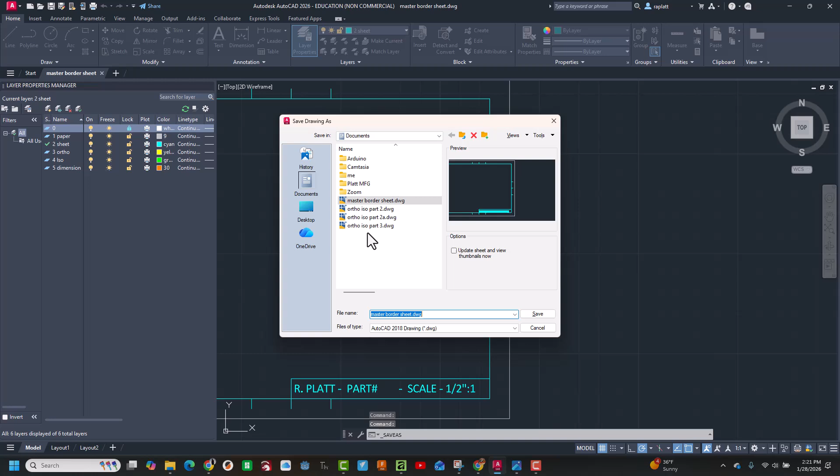Now at this time, let's go ahead and create part number 4. And like the last 3 previous ones, we're just going to double click on our master border sheet. And as soon as that comes up, we're going to make a couple quick changes and I'm going to check something. So I'm going to save this as, go ahead and hit the Save As button here, okay. And this time I'm going to say ISO part 4, okay. That way we protect our border sheets.

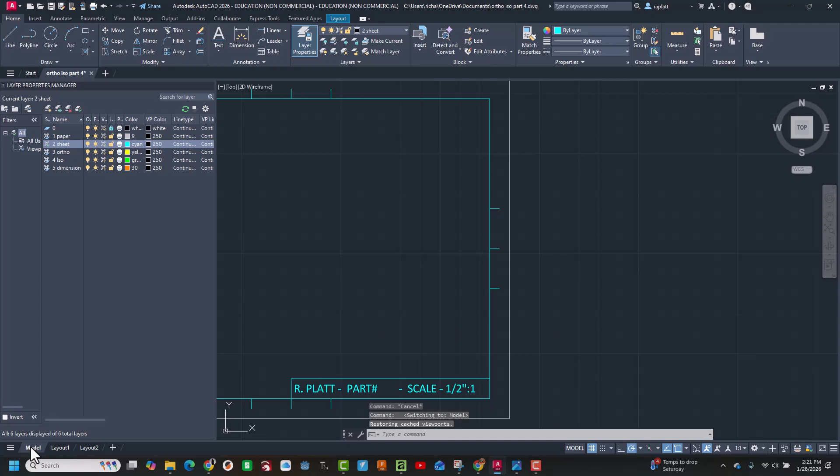Now I'm going to quickly come down here and check on model and make sure that all my print colors are correct. So I'm going to go here to layout, okay. Go back to model and double check everything is black. That looks good. Okay, so now let's go back to the model view here, model tab. We'll go ahead and center this up a little bit here. We already checked out on sheet. So come over here and we'll put in 4.

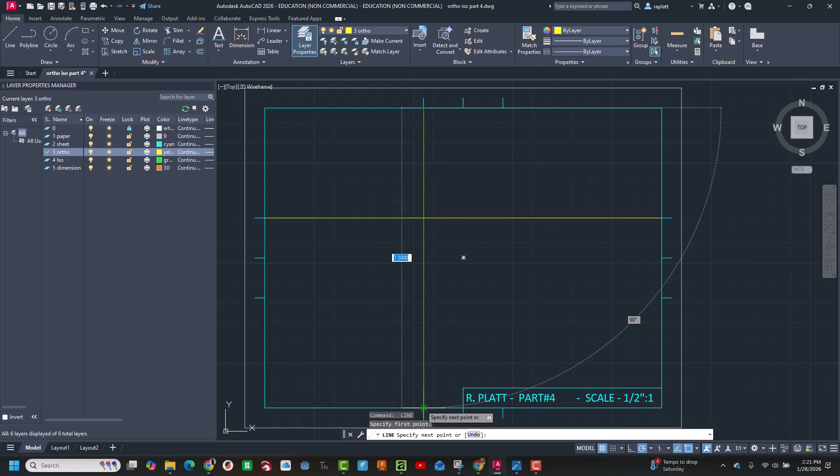Okay, before we actually look at the drawing, I'm going to go ahead and start laying out what this drawing is going to look like. So we'll go ahead and do our layout line. So we'll go ahead and hit the line command. And we'll come over here and click, go across here, hit escape, spacebar, which repeats the command. Come down here, snap on that, escape, spacebar, come up here, grab this guy here, come down, click on that, escape. Okay, now I'm going to hit my spacebar again, so I repeat that command, come over here, do this, and we got that in there.

Now, just because of the last time I did this, I'm going to go ahead and trim out this line here, and this line here. Quickly do a save, which is important. And now I'm going to go back and find that part 4, which I think is this guy right here. Yeah, that's it. Okay, it's a pretty simple part. This is not going to be that hard. The main thing we got to worry about is these hidden lines, and I'll show you how to set that. It's not that tough. So let's get back over to the drawing and start drawing. And remember, it's 2.5 high, 5 lengthwise, 1.5, and all those numbers divided by 2.

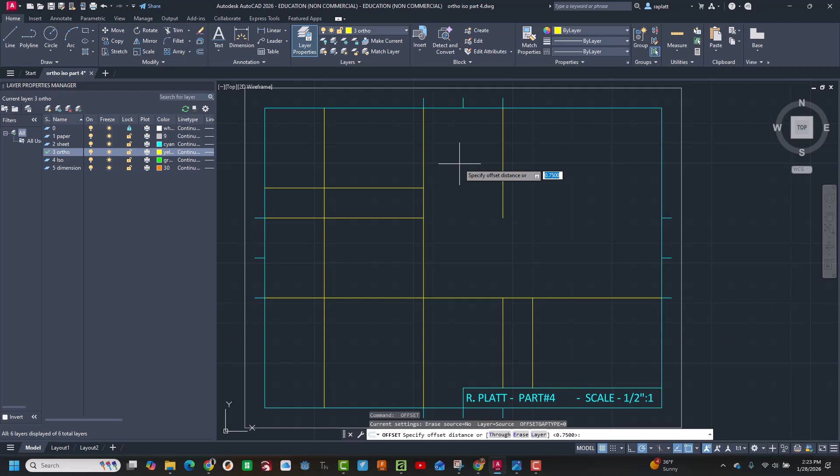So we'll quickly go back to our AutoCAD file right here, and we're going to go ahead and do our offset, and we're going to set our offset to 2.5. We'll hit this guy right there, comes over here, hit our escape, spacebar, this time 0.75. Okay, we'll go up from here, up. We'll come over here to this one and go over. That's good. Now we'll hit escape. And we're going to hit spacebar again. This time I'm going to say 1.25. Now to get us the height of our part. Come down here, got our height of our part.

Okay, let's go do some trimming right now. So we're going to trim all of this here off. Trim all of this here off. Okay, come back here and trim that. It's pretty easy. Now what we want to do is go back to the drawing, take a quick look at it. Okay, this says that it's going to be 0.25 high, 0.25 low, which is dividing 0.5 by 2, okay? So come back over here.

We're going to go ahead and do our offset, all right? So we're going to key in 0.25, enter. We'll grab this guy here, come down, okay? We'll come up here with this one and go up. That's easy. So hit escape, come back over here to this. So that thickness is right here. It looks like 1 inch. That's divided by 2, so it'd be 0.5.

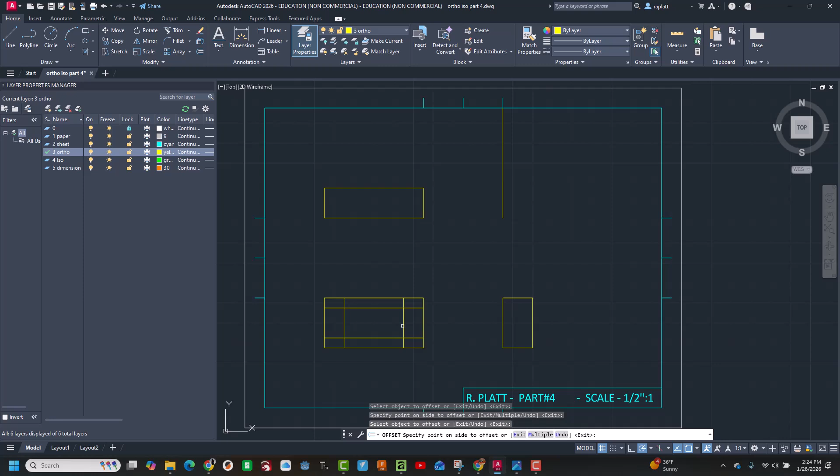Hit our spacebar again. This time we'll say 0.5, and we'll come over here and grab that one right there. Good. Come over here and grab this one. Good. Let's roll up on this. Take a quick look. We'll go to the trim command.

Scoot over here. Trim these out. Careful not to get the other lines. Okay. So that's rolled out. Now we need to put in hidden lines. Let's go back and look at that real quick.

So the hidden lines are these dash lines right here. And if you remember lineology, on the lineology, it defines what a hidden line is. So let's go back to our AutoCAD file. Now, what's important is we've got to go over here to these properties. If you hit this pull down, it shows all these continuous lines here.

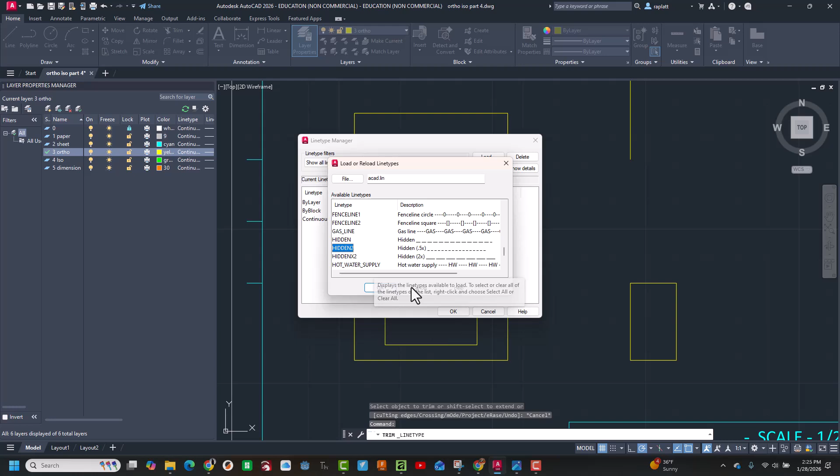So let's go to Other, and this time I'm going to say Load, and I'm going to scroll down here to, let me see if I can find it here. This hidden line 2, that's the one I want because it'll match the scale of what I'm doing and everything. So we'll grab that, hit OK, and it looks like it's loaded.

Hit OK on that. And now what I'm going to do is set myself to that hidden line. I get my line command, and I'm going to grab that corner right there and just go straight up. Click here and come up here to this. Looks good. Do the same thing again, spacebar again. Remember, spacebar always repeats the last command you're in. All right, that looks good.

Now, I'll come over here to this, hit spacebar again. Hit spacebar, scoot over here to my right to get to the front view. Excuse me, my right view, sorry. Spacebar again, after I hit escape. Whoops, didn't want to do that. Spacebar again. Okay. Come across, click, and go right over here to that. All right. Looks pretty good.

Looks like we got those orthographic projections in our top, our front, and our right. So now we'll go set ourselves to, whoops, let's make sure we save our file. Let's come over here, set ourselves to ISO. Double click on that, make it active. And this is going to be a pretty simple part to design, I think. So let's get started.

I'm going to go up. Oh, see how we're still in the hidden line? Stop that. Let's go back and make sure we're set to ByLayer. Make sure that's correct. Continuous black line. Let's try that again. All right. Pull off the side. Yeah, we're there. Okay, I got solid line.

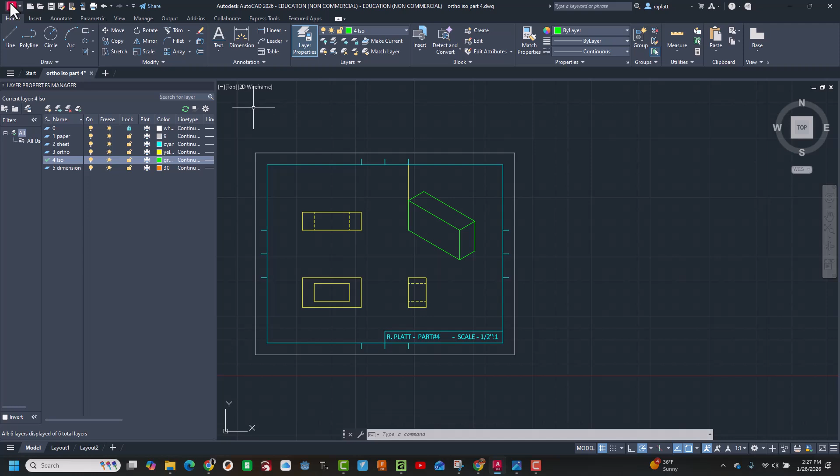Now we need to save our file and come back to this in a second. Now to draw this inner box in a little easier, we're going to do a couple things. I'm going to delete this line right here, select it and just hit the delete key. Now I'm going to come back here and draw this line down here this way. I'm going to say 0.5, okay? Then I'm going to take it straight down to here, which is fine.

Then I'll come over here and do the same thing again. I'll come up here, 0.5, enter. I'll go straight down here to where it intersects, and that's fine. Hit enter, okay? Now what I want to do is come over here to the midpoint, come up 0.25, okay? And then I'll just get on that and come right up here to that intersection, hit escape,

hit my extend command behind trim, and extend that down to there. That looks pretty good. Now, what we're going to do is go ahead and trim these lines out. Go to my trim command here.

If I can find it here. There it is. Trim. Okay, trim that out, which is good. We'll trim this out, which is good. Trim this out. Now, I'm going to go back to extend, and I'm going to extend this guy all the way over here. Let me go ahead and hit escape and go back and select this guy here, hit enter with my erase command. Now I'll go back to extend again, I'll extend this up there.

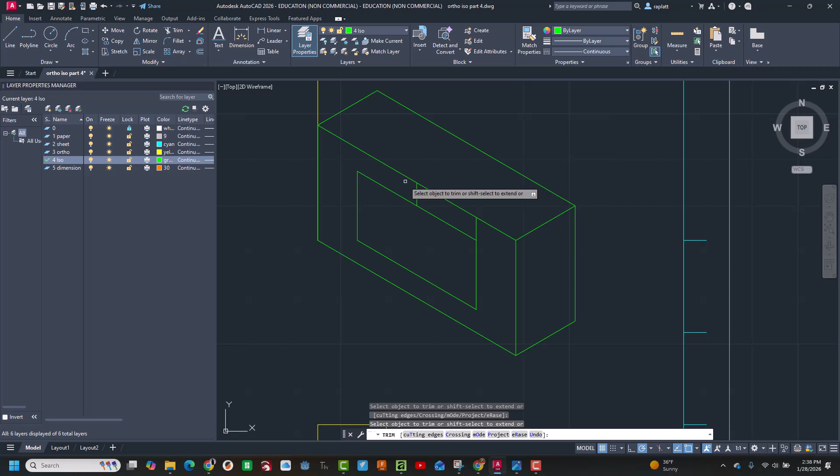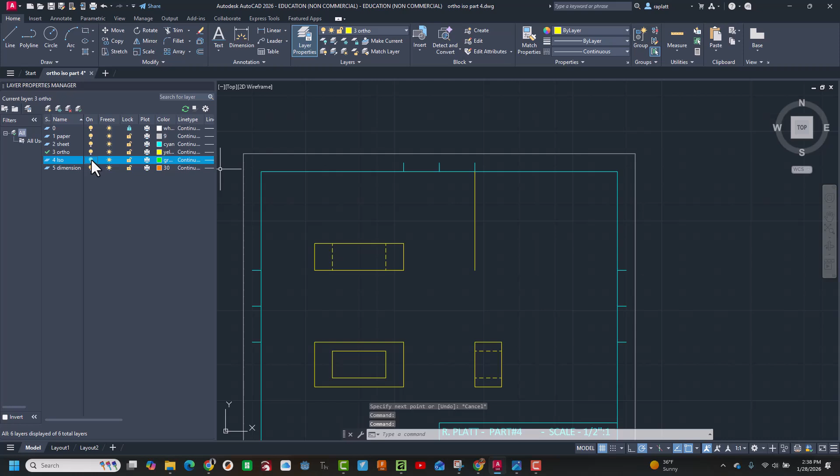Now, one of the things that's pretty common on a lot of the drawings that I grade and see is that students forget to come in and find that vertex and come all the way over here and put that in. So now, as you look here, we've got all that in, but we got some house cleaning to do. So we'll go back to our ortho layer. We'll come over here and turn off the ISO we just created, and we're going to trim out this guy, this guideline here we no longer need.

So we'll go back and turn the light on. Now you notice you turned it on. It's not on until you drag your mouse over there. Okay, that looks pretty good. So let's go ahead and save the file, and I'm going to come back to this in a moment. Now it's time for us to put our dimensions in. We'll go ahead and make our fifth layer, our dimensions layer, active by double clicking and getting our green check mark. Okay, so that changes our color to orange.

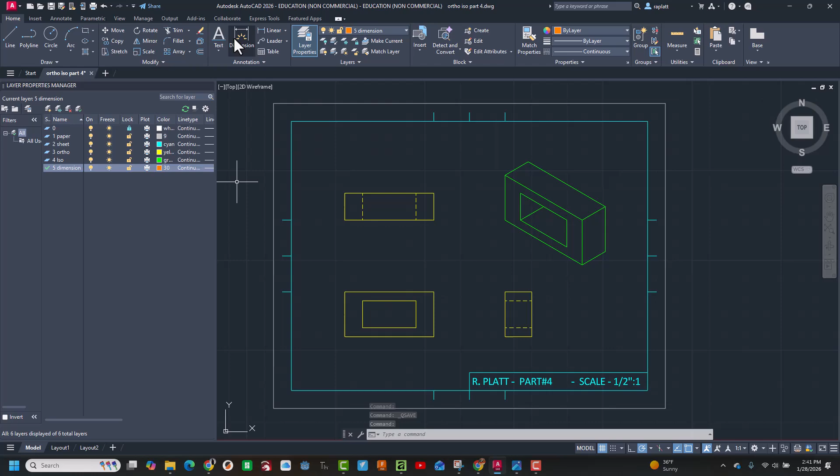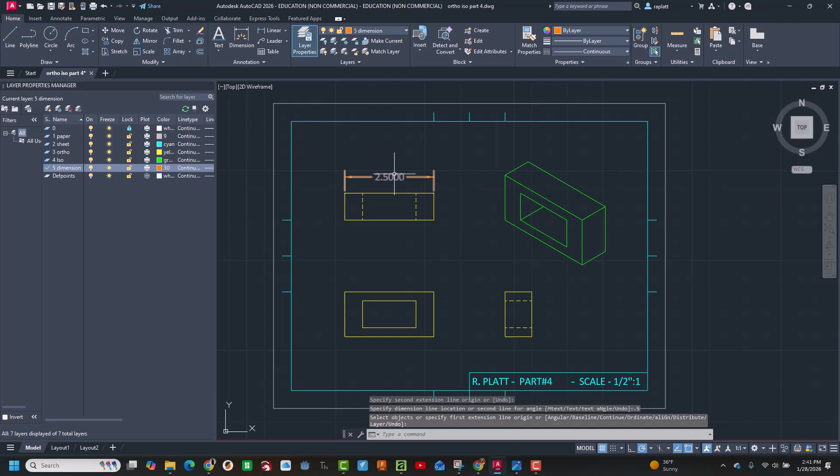Let's look real quickly back at that other drawing. Okay, we put that 5 up here on the top. Now, I don't show on mine the inches because it's actually declared down in the title block, but I'm going to go ahead and put it anyway. I'm going to come off that point there, 0.5. Okay, it looks good. Come over here and double click on this. Hit erase or delete. We're going to say 5.0000, double quotes, for inches.

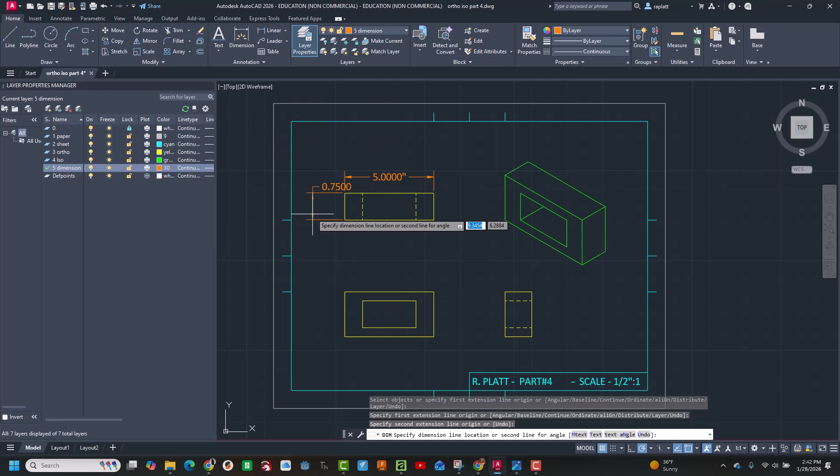Okay, quickly look back at the other drawing. Okay, 1.5. Go ahead and hit this guy again. Come over here to make sure I'm snapping onto that. Come over here like this. Whoops, let's do that again. We'll say 0.5. Okay, enter. And I probably should specify that right there. Okay, do 0.5 here again, sorry. Okay, that's in there. Now I need to roll up on this and fix this.

I'm going to select the dimension string here. I'm going to grab that 0.75, put it right here, kind of move it over to the side a little bit. That looks good. Hit OK. And I'll double click on this, hit my backspace, whoops, my delete key. Okay, it's 1.5000, double quote. Got that dimension in. Okay, go back to our drawing. These are 1 inch right here. Okay, it's easy.

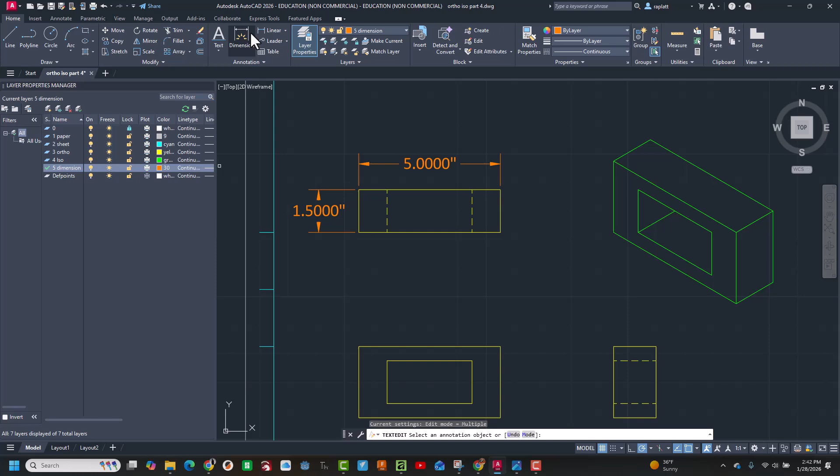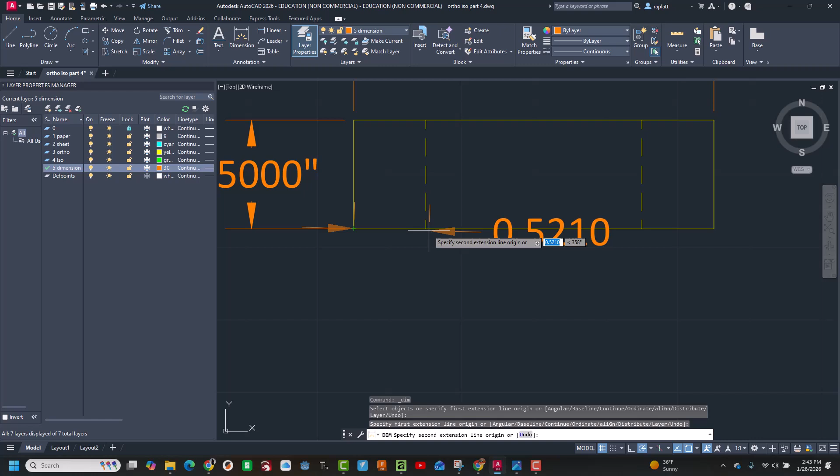So we'll hit our space bar and select an option to annotate. So I'll select, roll up on this, so escape again and try that one more time. All right. Oh, I'm hitting text. You need dimensions. Okay, here we go. Here, I need to come down 0.5, coming down in specifications there. Looks good. I'll go ahead and hit escape, and I'm going to double click on this. And I'm going to hit delete key, and it's going to say 1.0000. Okay, double quote.

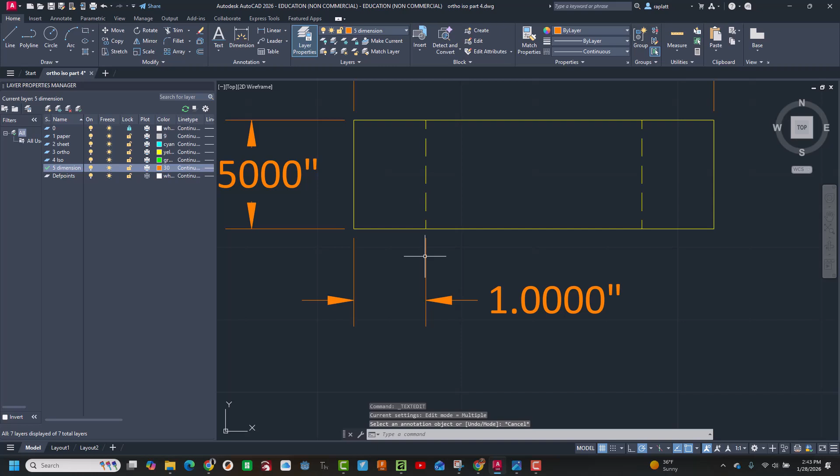And now I'm going to hit escape again, click on this. And I can just move this over here. I think it'd look a little bit better. No, it actually doesn't. So let's roll out here on this second. Look at this. Pull that up. See if I can grab that guy there. Pull that down. No, it's not working. I'm going to go ahead and hit delete on this and just redo that.

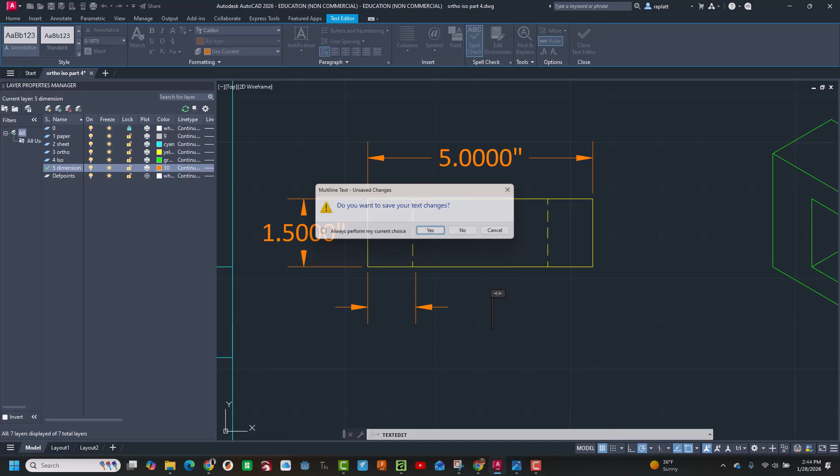Okay, we'll come up here to this guy one more time. Come down 0.5. Okay. Definitely got that dimension wrong. Okay, we'll get rid of that. No. All right, let's see if we can get rid of it now. Nope. Gotta be selecting the dimension.

Okay, now we delete it. Back to dimension. Okay, got that in there. We'll double click on this text, hit our delete key, 1.5. Oh, wait, that's 1 inch. 1 inch, 1, 2, 3, 4. Quote, enter. Good. Okay, let's do the same thing on the opposite side. Okay, we'll start over here.

Pull that there. Actually, if you notice how I started to the left and went to the right, the text went that way. So we're going to reverse that. We're going to start right here and go the opposite way, come down 0.5. That looks a lot better. Okay, and then we'll go ahead and double click on this, delete key, 1, 1, 2, 3, 4 inches. Okay, now it's best to kind of line these up if you can.

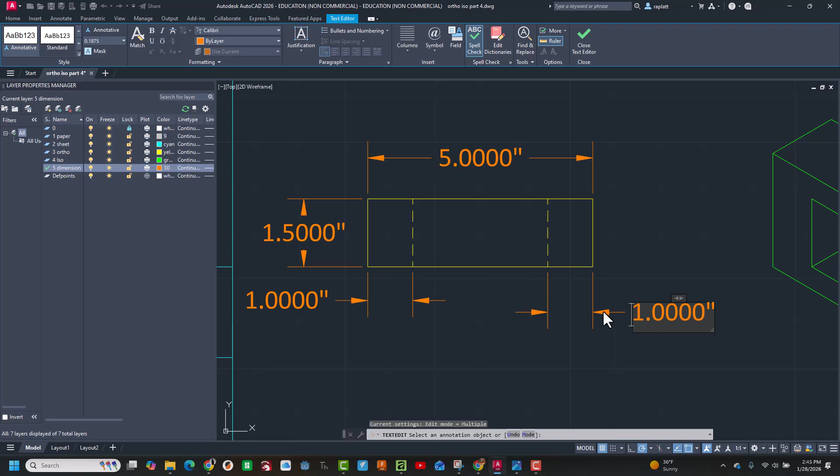Let's get out of this command altogether and line these up as close as you can get them. I'm going to try to move this up just a bit. Right there looks good. Okay, we got that in. Now let's go check our drawing. Looks like we got a couple dimensions here we got to put in, this one right there. So we'll roll out, go to our front view, pan over using our middle mouse button.

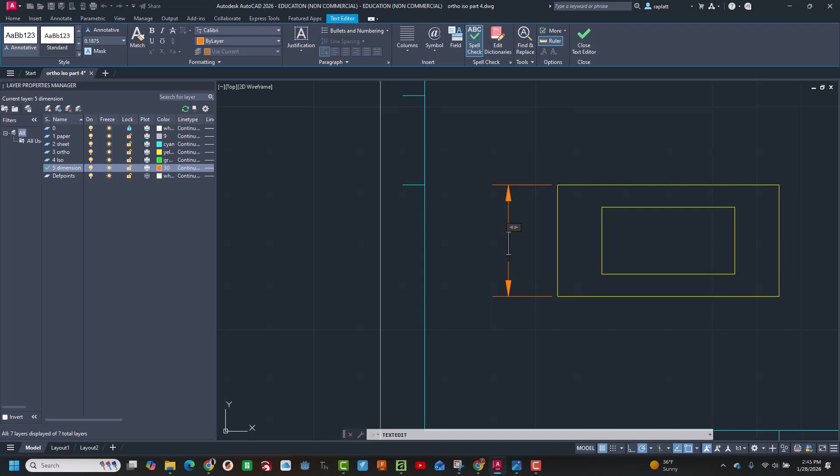We'll select this, come down here like this right here, come over. That's good. Just go ahead and edit that, hit delete. It's going to be 2.5. 1, 2, 3, double quote. Got that in. All right. Go back to our drawing, take a quick look. Okay, we can do that.

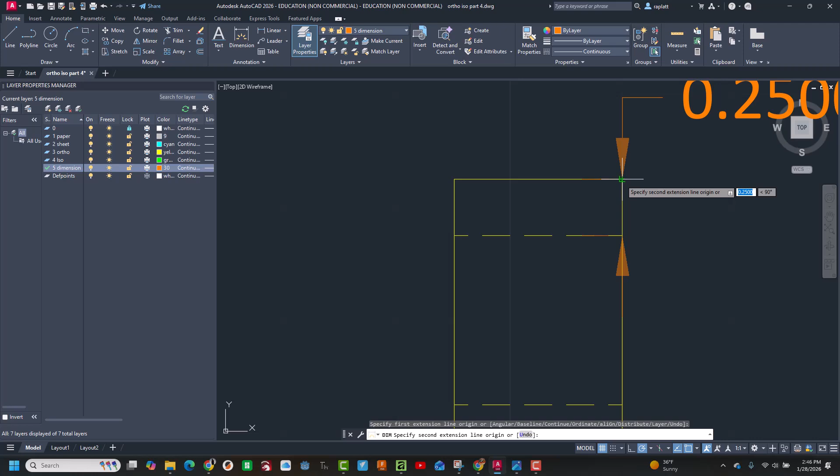So we'll come over here on the right view. We'll roll up on this, find that point. Okay, let's roll out. Yeah, looks good. Okay, we'll roll up, go back and look at that other one. It's going on the opposite side. Let's go ahead and fix this dimension real quick. Okay, delete

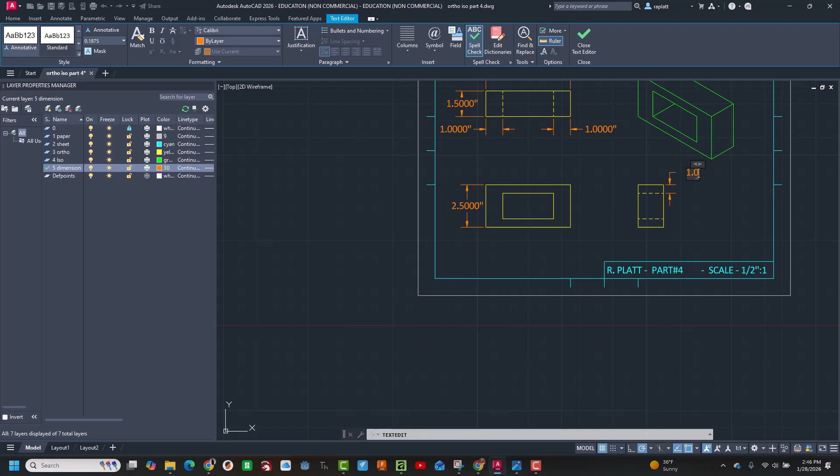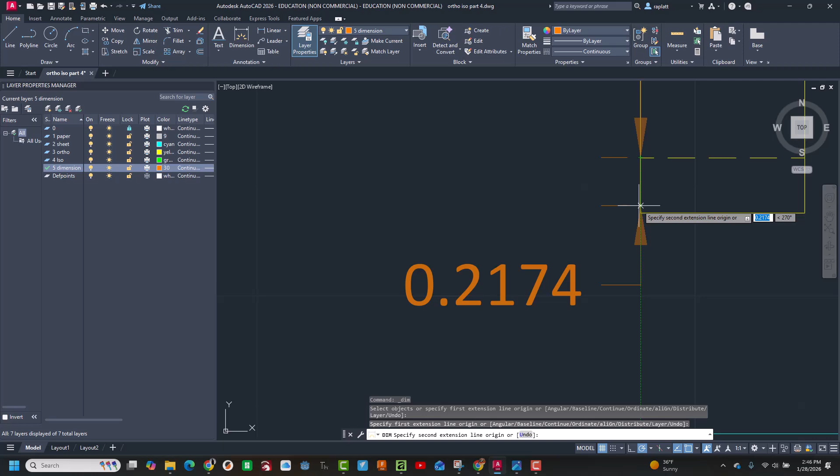1.1234. Wait a minute, that's not right. Oh, it's 0.5, sorry. Glad we checked that. 0.5, 1, 2, 3 inches. Looks good. Okay. So what I'll do next is I'll come over here to roll up on this. I'm going to start that over again. We're going to go the opposite way because I want the dimension to be on the opposite side. Here, looks much better. Go 0.5.

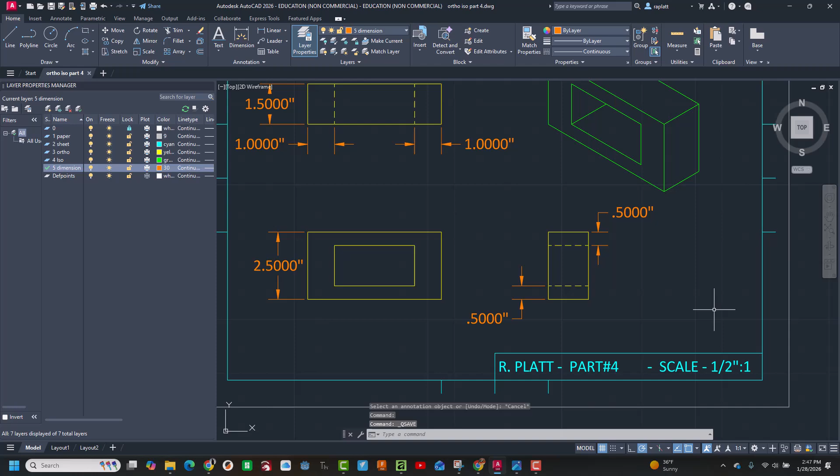Okay, enter. Double click on the text, hit escape, double click, delete key, 0.5, 1, 2, 3. Double quote, done. All right, so let's go ahead and save our file. Got that file saved, looks pretty good. Okay, so one other thing real quickly on our layer styles: we need to go back into our masters and make sure we set hidden line 2 in there so all subsequent drawings will have that same hidden line. We'll do that again. Okay, so escape out of that, save our file again, just to be on the safe side.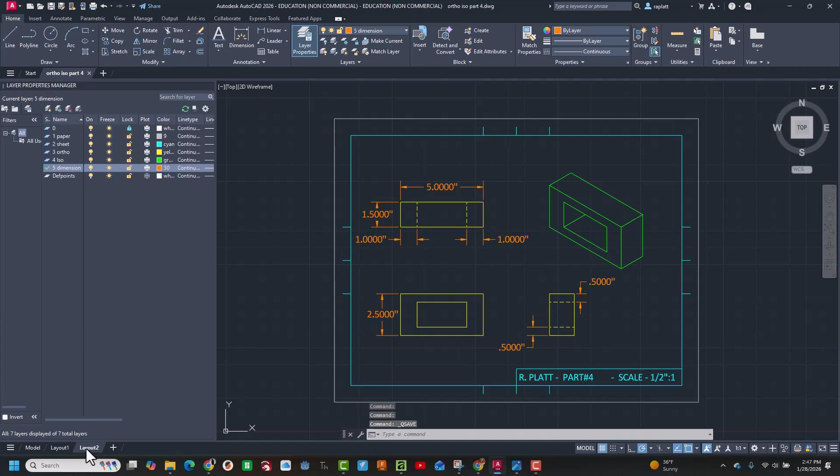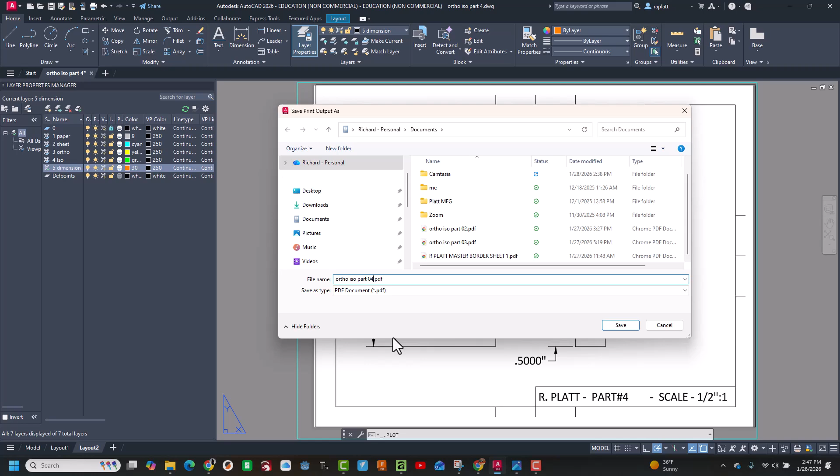And again, I like to use layout 2, so there it is, kind of squared up, looking like it should be. So let's go ahead and hit plot, because I've got all those color things set from my previous work. Go ahead and hit OK. And we're going to come down here and select Ortho ISO Part 3, and we're going to change that to 4, and hit Enter. Now let's see if it shifts on this drawing once it's finished. Looks like it didn't, so let's be on the safe side.

Let's go check our Documents folder where we house that drawing, and I'm going to find that drawing. Here it is, PDF, Ortho ISO 4, open with Chrome, as good as any. Let's rotate this around. Yeah, looks good to me. Okay, I think we could get that part made anywhere in the world based on how we designed that.

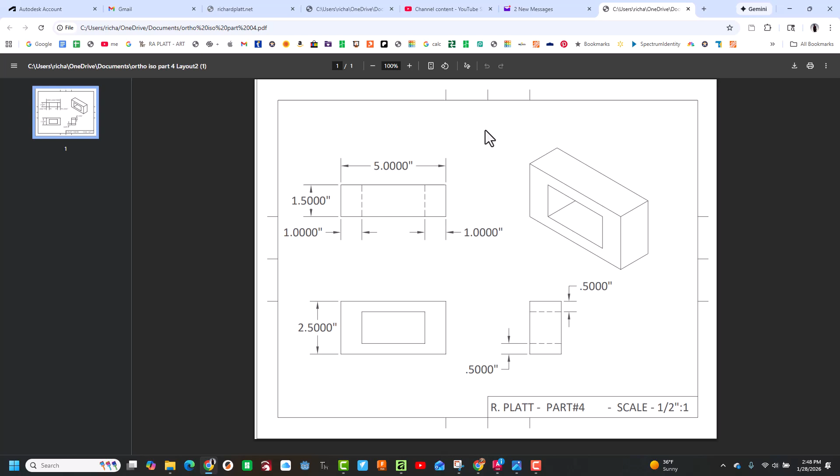Okay, so again, take this file, go back to the thumb drive or memory stick, load the memory stick or thumb drive, copy this to the thumb drive, go over to the computer with the laser printer on it, and we'll do that.